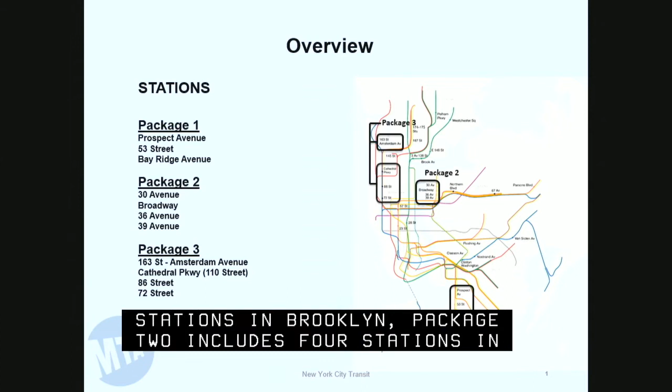The Enhanced Station Initiative includes a new approach to rapidly transform subway stations across the system. The initiative will focus on the continued responsibility of providing a state of good repair in stations, and starting with the revision to the station guidelines, dramatically change the look and feel of the stations.

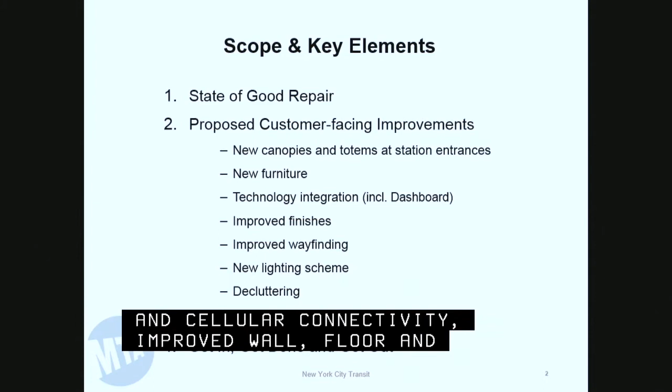Customer improvements being considered include new features such as canopies and informational totems at station entrances, a new family of coordinated furniture, integrated technology including Wi-Fi and cellular connectivity, improved wall, floor, and ceiling finishes, new signage, wayfinding and lighting, and the chance to declutter the station, where possible routing the conduits and cables in a consolidated path for better aesthetics.

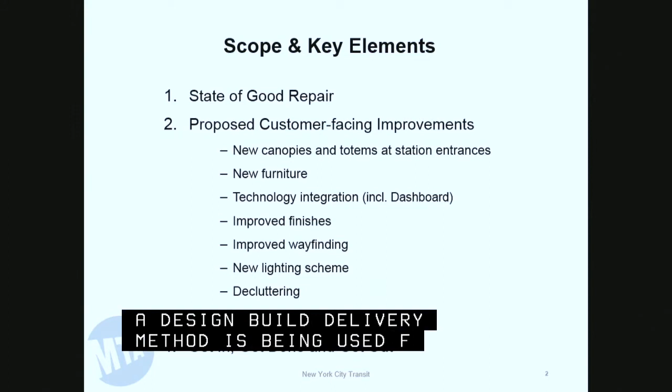A design-build delivery method is being used for the first time in the station's program area. Design-build is the process whereby a single contractor is responsible for both the design and construction of the project. It allows construction to start much sooner than the traditional design, bid, build method, fast-tracking the project and saving time, allowing the contractor to get in, get done, and get out.

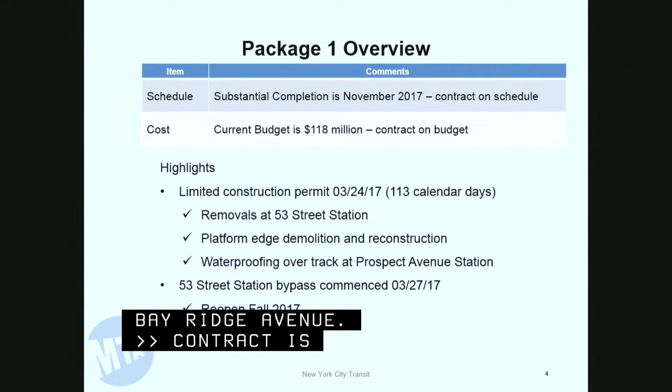The contract is on schedule for a November 2017 completion and is on budget. The first limited construction permit was issued 113 days after the design builder came on board.

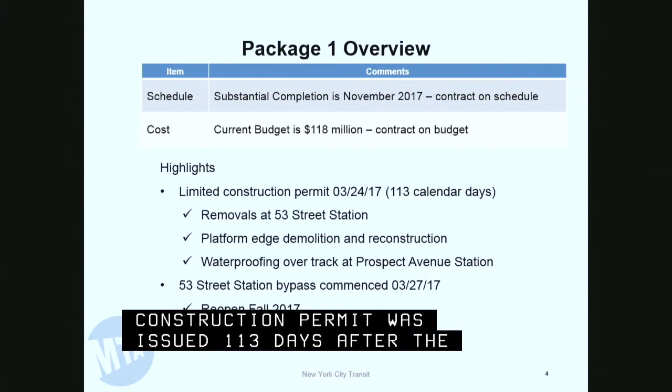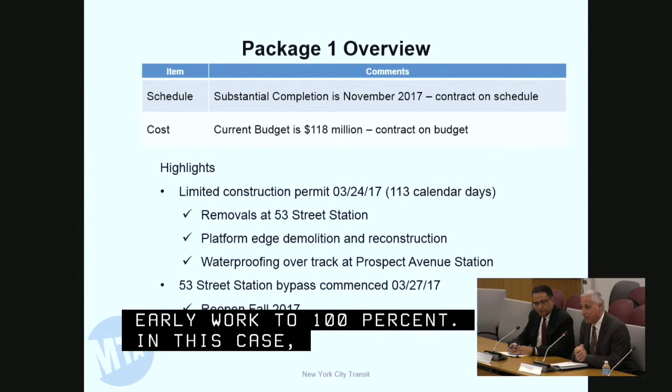Using the design build delivery method, we took advantage of the fact that the entire project did not have to be completely designed before the construction started. The contractor brought the early work to 100%. In this case, removals at 53rd Street, platform edge demolition and reconstruction, and waterproofing at Prospect Avenue. A construction permit was then granted, and the contractor was able to commence with the work.

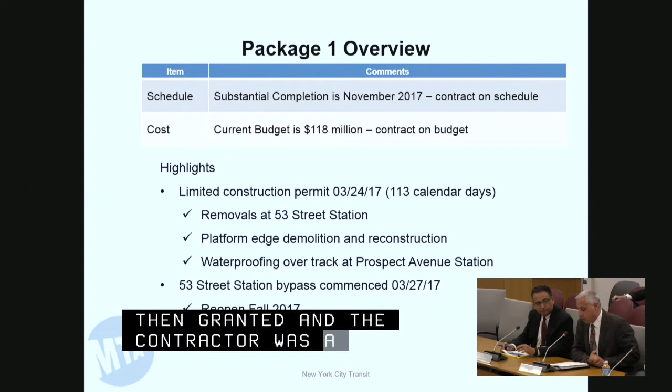This first limited permit allowed us to bypass the 53rd Street station on March 27th, and we are on schedule for a reopening in the fall of 2017.

We are managing what we see as the top 3 risks for Package 1: track access, unforeseen site conditions, and late deliveries can delay the already aggressive schedule. Constant communication and having a co-located team has proved beneficial in mitigating these risks.

Weekly updates will be provided for long lead items, such as informational totems and dashboards, to ensure delivery dates are met. The program facilitator has held 4 risk workshops, and the entire ESI program is using lessons learned to inform upcoming packages.

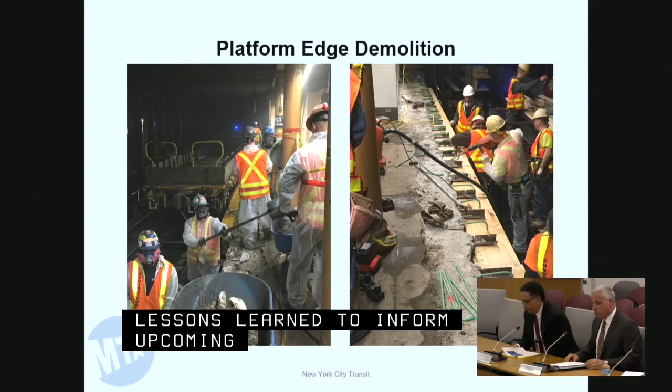Here are some photos of the work accomplished. The photo on the left shows the platform demolition, and the one on the right shows new rebar being installed. The best way to describe this work is that of an assembly line. Behind the demolition crew is the rebar crew, and behind the rebar crew is the concrete crew.

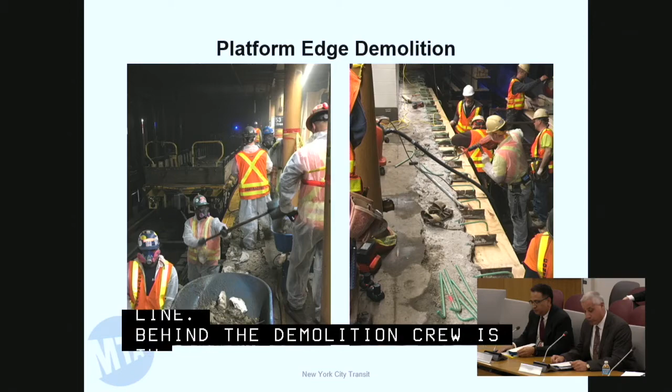On the left, you can see the rebar crew has passed through, and on the right, the concrete edge has been poured at an elevation ready to accept the new flooring.

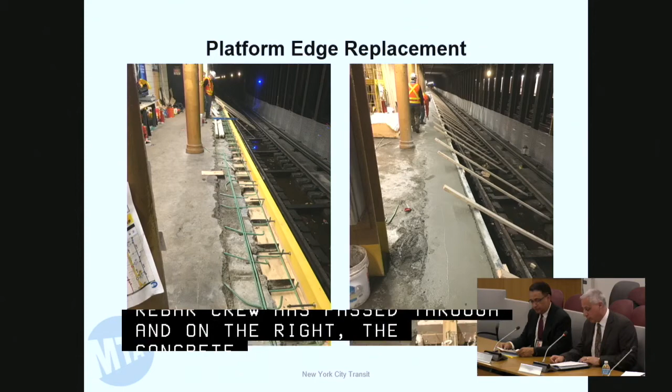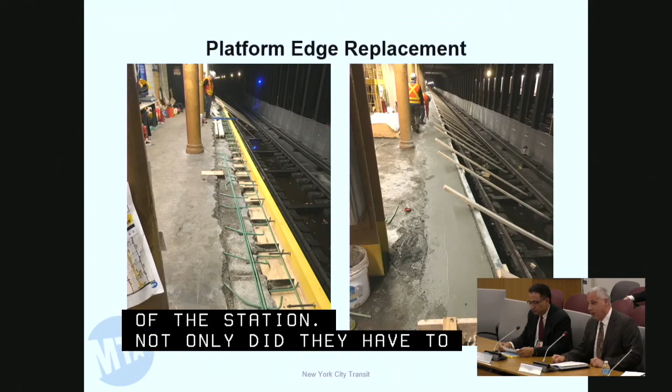While this may seem like rough demolition work, there is a delicate side to it. Throughout the weekend, over 200 workers were in and out of the station. Not only did they have to know what work they were performing, but also where they were performing that work and what work was going on next to them. The planning and choreography of the crews took much longer than the 53 hours it took to perform the work.

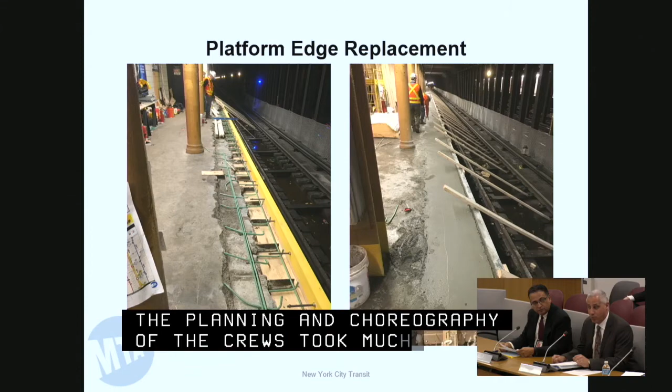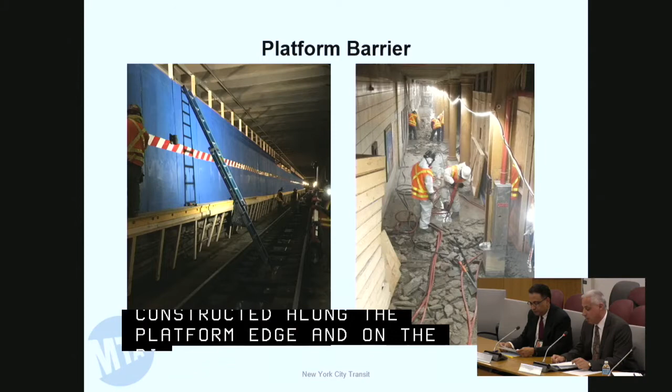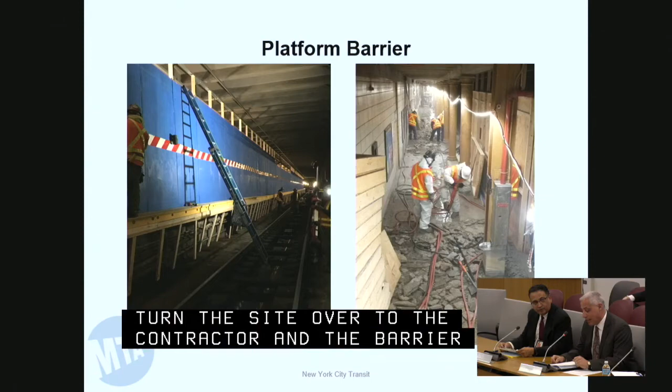The photo on the left is that of the barrier that was constructed along the platform edge, and on the right is the contractor working safely behind that barrier. One of the key points to any design-build contract is to turn the site over to the contractor, and the barrier does just that. It gives the contractor full access to the site without affecting service on the line.

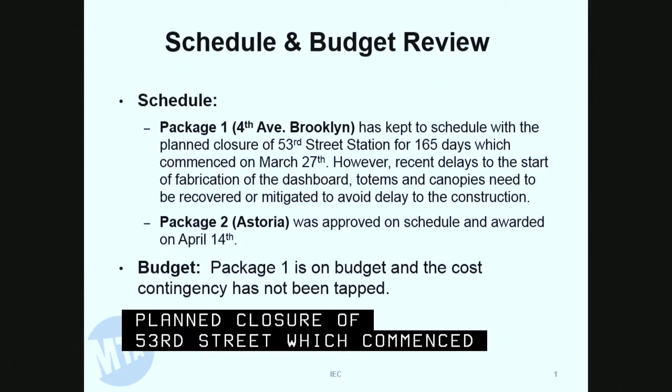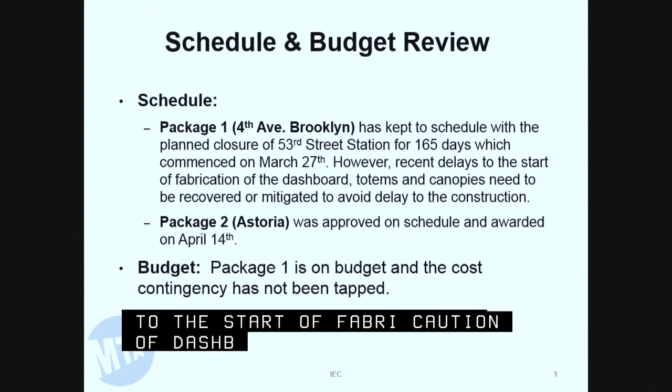Good afternoon, Mr. Chairman. In our initial report on this program, let me start with the schedule and budget review. For schedule, Package 1 has kept the schedule with a planned closure of 53rd Street, which commenced on March 27th. One thing we're watching closely is some recent delays to the start of fabrication of dashboard, totems, and other critical design elements for these improvements. Those delays need to be recovered or mitigated to avoid impacting construction.

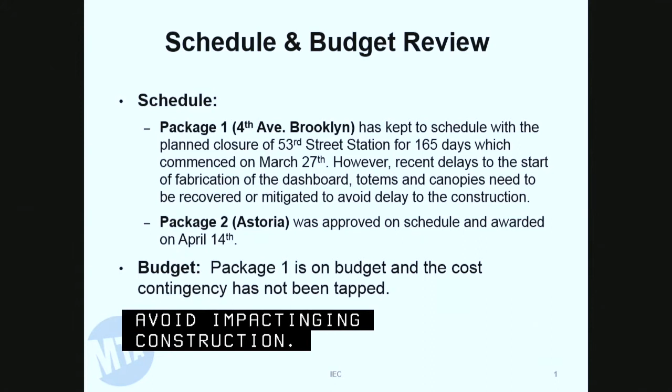Package 2, as you heard, has just gotten going. Looking at the budget, Package 1 is on budget, and the cost contingency remains intact.

Turning to a few observations on the program, I think we should recognize the project team for their organization. They've co-located the management, the key consultants, and representatives of the user groups into one project office, something that's cited as best practice by the design-build business, and it certainly has started out expediting information and resolving issues quickly.

We also want to support the program team's efforts to improve the schedule control of the fabrication of the long lead items I talked about earlier. And finally, the project has taken a careful look backwards at their first package and put together a process for assessing the design development and categorizing the lessons learned from their first experience, in order to improve particular details, requirements, and schedules for the remaining packages. That certainly will benefit the program as a whole.

That's my report. Thank you. Are there any questions or comments on the Enhanced Station Initiative? Mr. Albert.

While it's not the case on the 4th Avenue line in Brooklyn, there will be some places where there are some historical elements in the station, such as wonderful old tile work, and I just wanted to make sure we have a policy that while we're going to relight and put in fancy electronic gizmos, some of the history of the system will not be obscured by these new treatments.

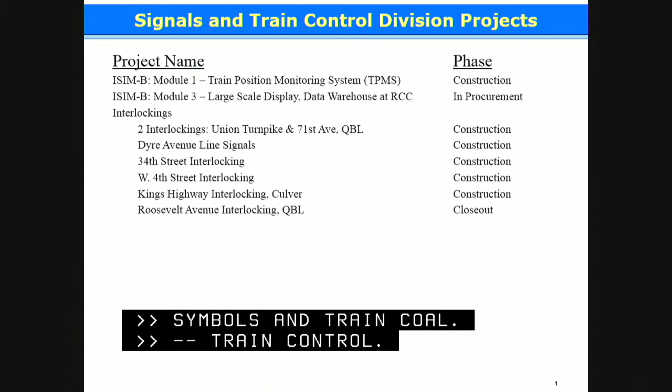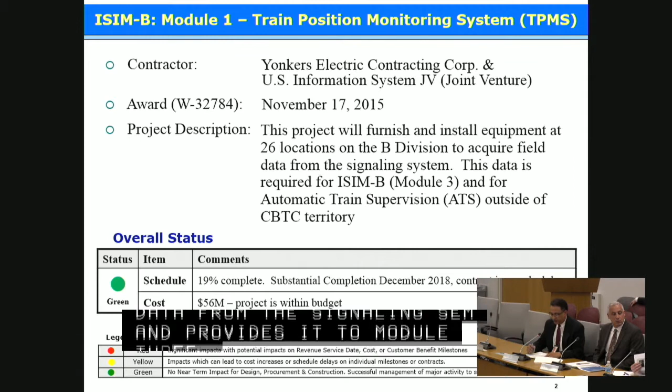I will update you on Integrated Service Information and Management projects, the ISIM projects. ISIM Module 1, the Train Position and Monitoring System, or TPMS, has been awarded to Yonkers Electric and U.S. Information Systems as a joint venture in November of 2015. This contract captures the field data from the signaling system and provides it to Module 3, which I'll speak to next. The contract is on schedule and within budget. The project has been making good progress and is doing good work in the field detail design.

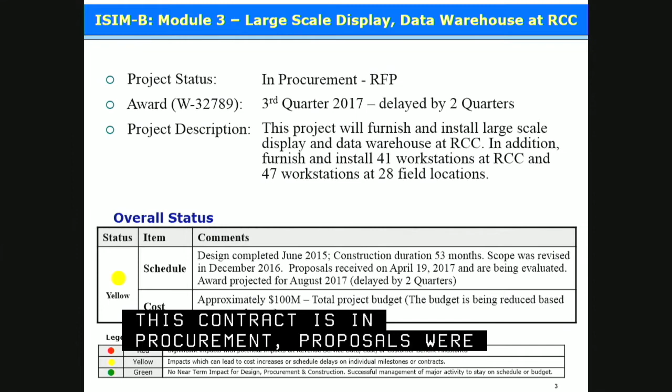ISIM Module 3, large-scale display and data warehouse at the RCC. This contract is in procurement. Proposals were received last Wednesday, April 19th, and are under review. The project will be awarded the third quarter of 2017 with a delay of 2 quarters. This delay is due mainly to the change in scope and budget.

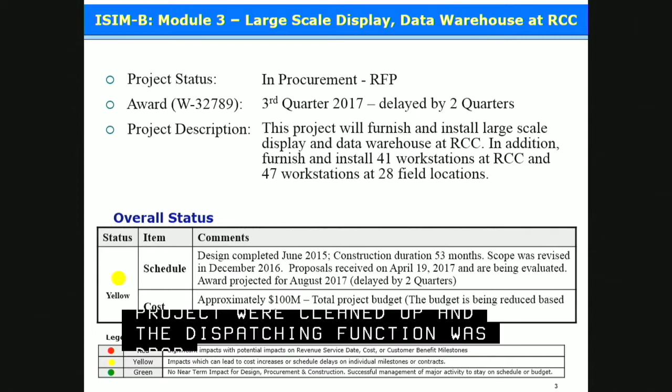All overlapping functions between the QBL ATS and the ISIM-B project were cleaned up, and the smart dispatching function was dropped. Furnishing the large-scale display for the entire B division and a data warehouse for the subway operations remains in. Total project is down to $100 million as a result of the scope change.

The interlockings: the following projects are the 6 interlockings that we have currently in construction. All are running on schedule and within budget except for 2. The substantial completion of the 2 interlockings at Union Turnpike and Continental 71st Avenue is now projected for May of 2018, and Dyre Avenue now is projected for November of 17. Dyre also has a budget mod in progress for approximately $7 million.

Both projects have developed detailed in-service schedules, and all TA service needs to support these in-services have been agreed upon by all supporting departments. That concludes my presentation. Thank you. IEC?

Good afternoon. My name is Nabil Gali. I'll present the IEC's report on the New York City Transit Signal and Train Control Program. This afternoon, we'll address the Integrated Service Information and Management B Division Program, as well as the interlocking signal modernization projects.

With respect to Module 1 of the Integrated Service Information and Management Program for Division B, the project is currently in the construction phase and remains on schedule and within budget.

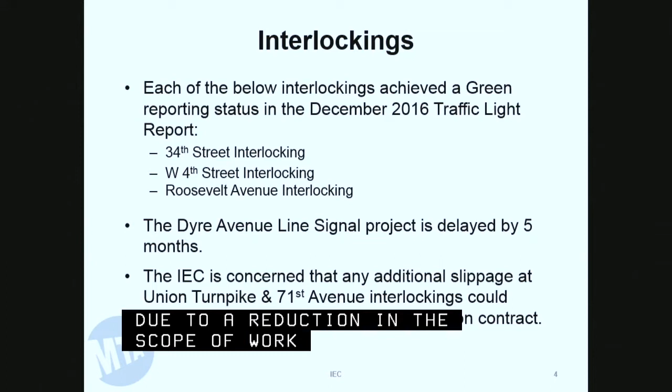With respect to various interlocking projects, as reported by the project team and based on the traffic light report presented at the December 2016 CPOC meeting, interlocking projects at 34th Street, West 4th Street, and Roosevelt Avenue are currently on schedule. Dyre Avenue Line Signal project is currently delayed by 5 months, and additional slippage was reported by the project team for Union Turnpike and 71st Avenue interlockings. This concludes IEC's report on the Signals and Train Control Program.

Questions or comments on signals and train control?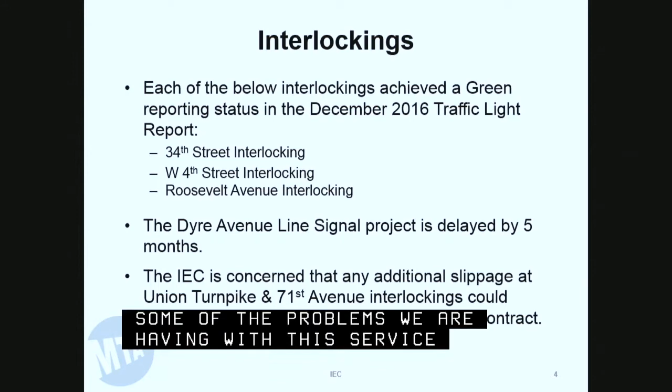Okay, report on systems and security. Mr. Beanstalk. Good afternoon. My name is Mark Beanstalk, and I'm the Program Officer for Systems and Security.

Today I will be updating you on the following projects in my program area: the recently completed VHF radio system, the Flushing Line Public Address Customer Information Screen project, Help Points and Passenger Station Local Area Networks, a new initiative to advance the delivery of train arrival information on the B Division, and finally the Bus Radio and Bus Command Center projects. The VHF radio project was awarded to Alcatel-Lucent in 2012.

In 2015, Nokia purchased Alcatel-Lucent and took over this contract. This project successfully upgraded the old New York City Transit VHF radio system to a new system, which complies with all FCC rules and regulations. The project was substantially completed within budget in December 2016. Closeout activities are continuing.

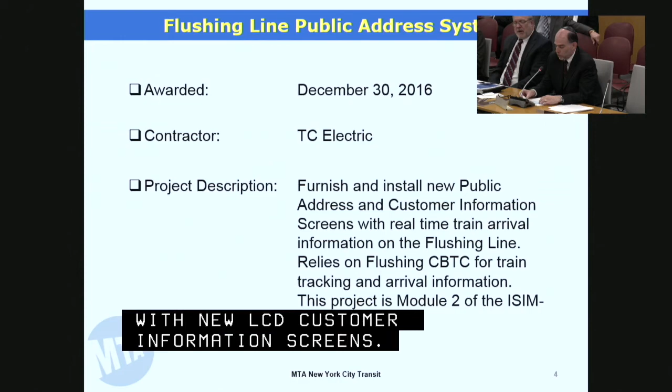The Flushing Line Public Address Systems contract was awarded in December 2016. This project will install new state-of-the-art public address systems on 21 Flushing Line stations from Main Street in Queens to Times Square in Manhattan. Stations will also be equipped with new LCD customer information screens. A new PACIS system was already installed at the 34th Street Hudson Yards station and is not part of this contract. The contract has a 27-month duration and a total project budget of $53.12 million.

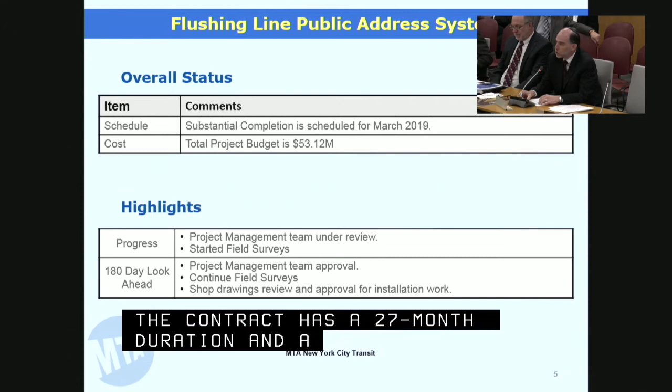There are no issues to report at this time. We are exploring options to accelerate the deployment of CIS screens at the stations in order to advance the delivery of train arrival information generated by the Flushing ATS system.

Help Points are one of our most successful customer communications systems. Nearly 2,500 Help Points have been installed in 399 stations since installation began in 2014. Help Points will be installed in 459 stations by the end of 2017.

The 9 Sea Beach Line stations, 3 ESI stations, and new Cortlandt Street stations are planned to open in 2018 with a full complement of Help Points. The total cost of the Help Point program is approximately $250 million.

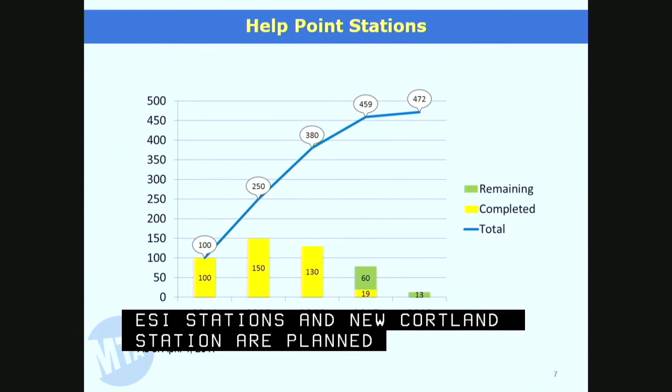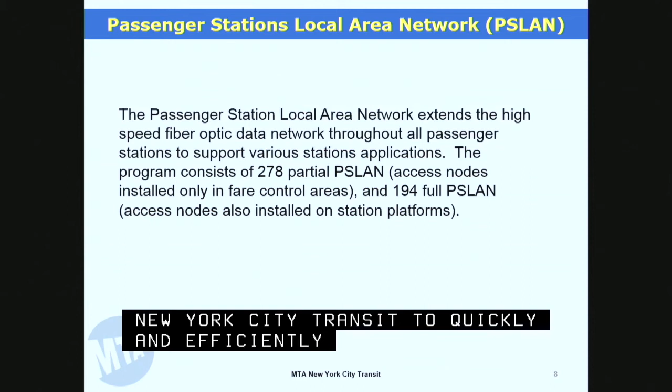The PSLAN, or Passenger Station Local Area Network, is this in-station network which allows New York City Transit to quickly and efficiently deploy new IP-based technology and services in passenger stations. The PSLAN connects the stations to New York City Transit's data centers over our existing wide area network. The PSLAN installation program also began in 2014, primarily to support the Help Point initiative.

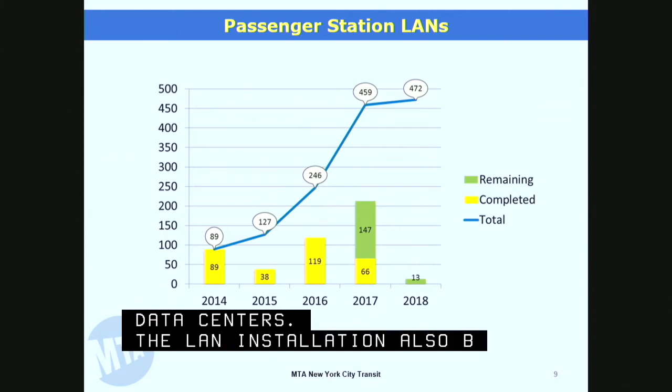Like Help Points, completion of all stations will conclude with the 9 Sea Beach Line stations, 3 ESI stations, and Cortlandt Street station in 2018. The total cost of the PSLAN program is approximately $110 million.

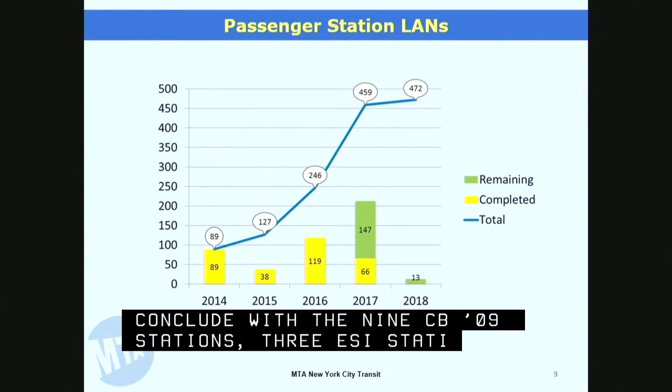This is the first report to CPOC on the new B Division train arrival project. This project grew out of a technology investigation and pilot which began several years ago to identify a way to provide countdown clocks on the B Division. The technology has now matured and can be used to provide train arrival information for all B Division subway stations.

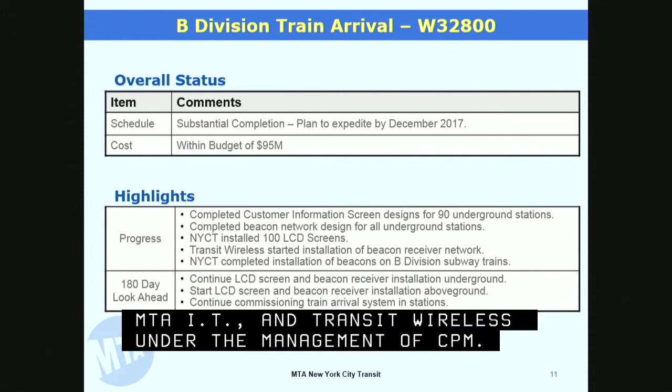The project is being implemented by the Department of Subways, MTA IT, and Transit Wireless under the management of CPM. This project will install new LCD customer information screens in B Division stations to display train arrival and customer information.

Beacons installed on trains broadcast information to receivers in passenger stations. The information is processed by New York City Transit's iTrack system and transmitted back to the stations to be displayed on the customer information screens as well as on the app.

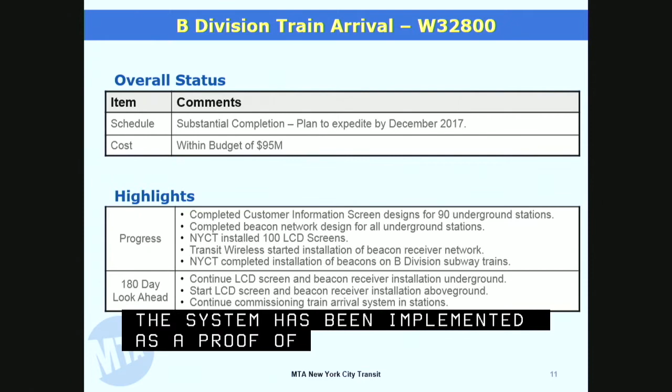The system has been implemented as a proof of concept on 8 Broadway Line stations and most recently at the main fare control areas of the 2nd Avenue subway stations.

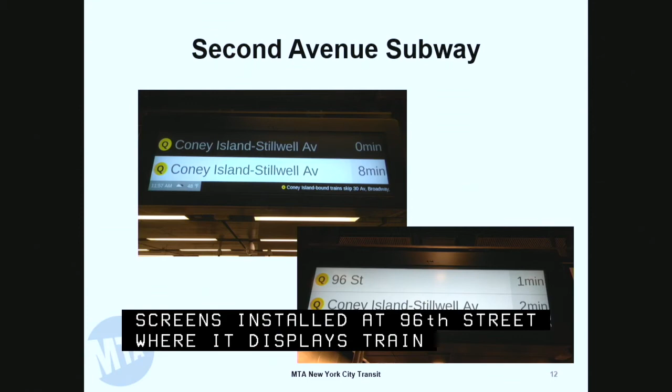The bus radio system project was awarded to PTG just over a year ago. Under this project, PTG is designing and installing a new digital bus radio system for New York City Transit and MTA Bus. To date, we have completed surveying all base station sites citywide.

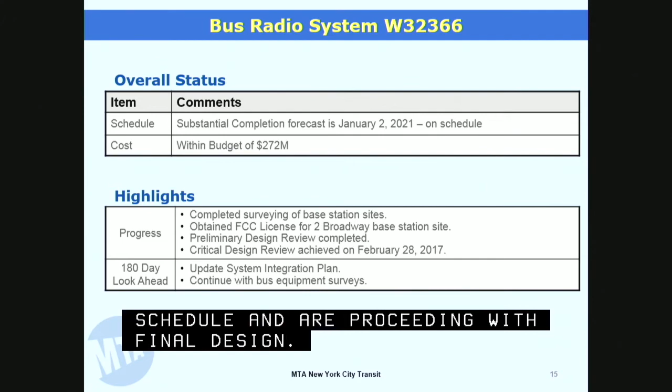We recently achieved the critical design review milestone ahead of schedule and are proceeding with final design. We are also preparing for the pilot installation on the first 200 buses. At this time, there are no delays to report to the project contractual critical milestones.

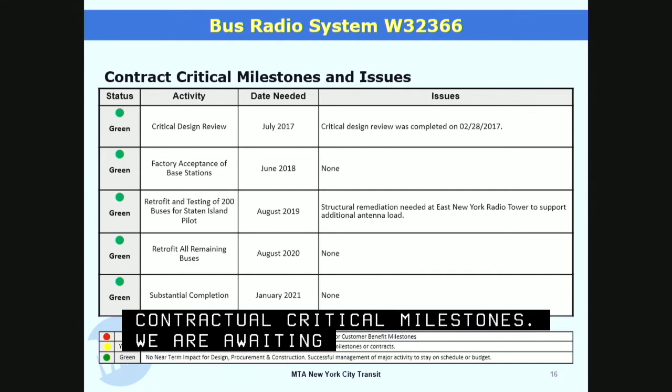We are awaiting a final report from the engineering consultant on the East New York antenna tower, which will require some remediation work to safely support the new antenna loads.

The Bus Command Center construction contract was awarded to MPCC Corporation in June 2015, and construction activities are underway. To date, the contractor has completed the foundation and started erecting the steel superstructure. The precast exterior wall panels have been delivered to the site and are also being installed. Over the next 6 months, the building will be enclosed and interior work will commence.

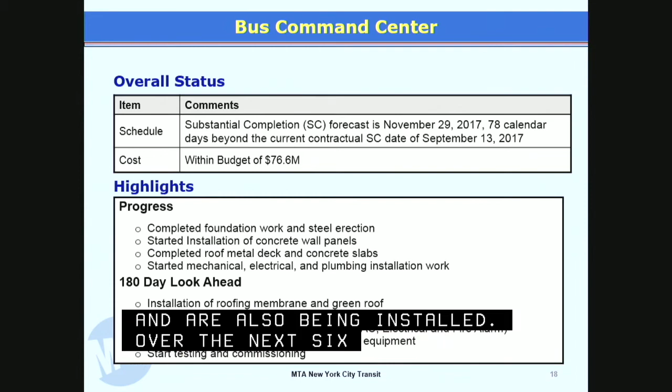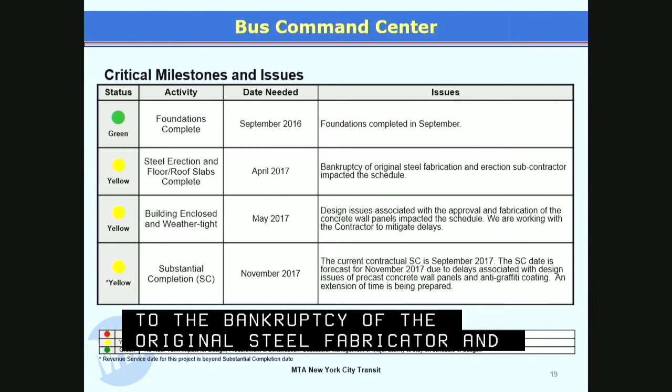We have established 4 interim reporting milestones for major construction activities, and their status is shown on this slide. We did experience some delay due to the bankruptcy of the original steel fabricator and erector, but a new subcontractor was identified and engaged. In addition, there was some delay due to the redesign of the precast exterior wall panels and change to the anti-graffiti coating.

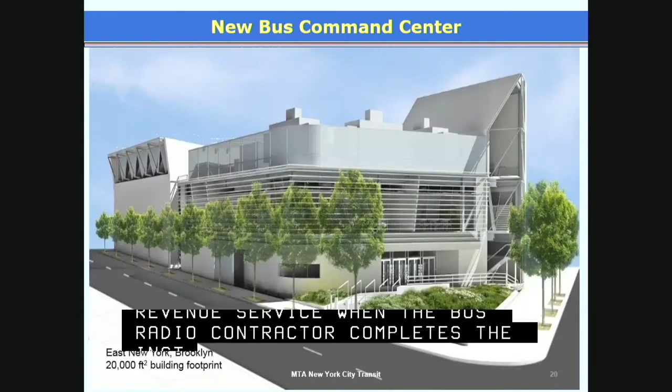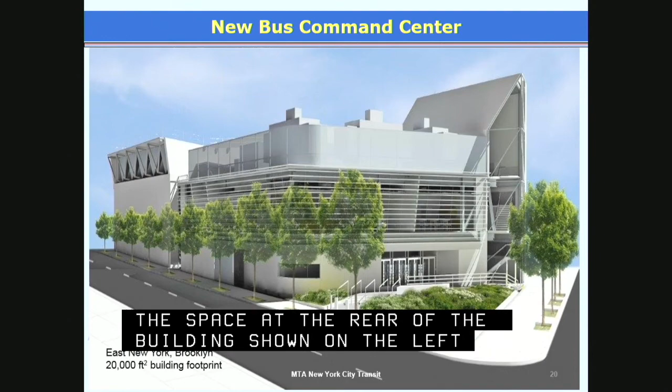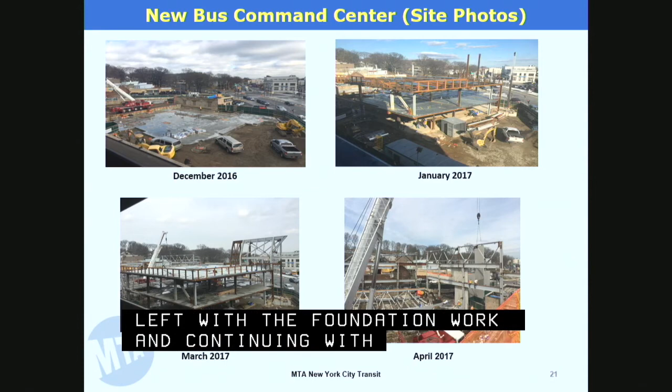These photos show progress at the site, starting on the top left with the foundation work and continuing with the steel erection through March, and the recent precast concrete exterior panel installation, which began this month. This concludes my report. Thank you.

IEC, good afternoon. My name is Calvin Gordon. I'm presenting the IEC's review on 4 projects in the Systems and Security Program. These projects are the Flushing Line Public Address System, the B Division Train Arrival, Bus Radio System, and the Bus Command Center.

Looking at the Flushing Line Public Address System, as far as the schedule and budget review, the IEC notes that the project is currently on schedule for March 2019 substantial completion. Additionally, as the project was only awarded in December 2016, there are no issues with the project budget.

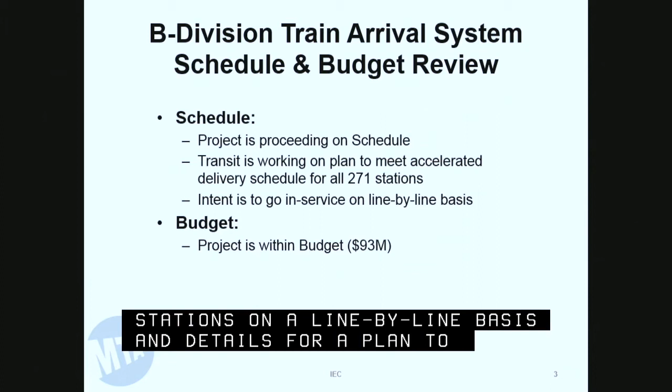Next slide, B Division Train Arrival System. Looking at the project schedule and budget, the IEC finds that the project is on schedule. The intent is to roll out these stations on a line-by-line basis, and details for a plan to achieve an accelerated delivery of all 271 B stations is being worked on by the project team, and IEC will review once it's finalized. The IEC also finds that the project is currently within budget.

Looking at the B Division Train Arrival System observations, the IEC wants to note that this is a predicted method for train arrival. Therefore, the accuracy is based on real-time information generated by RTO. In regards to the accelerated schedule that was mentioned earlier, the IEC feels close coordination with transit wireless efforts is essential in achieving the rollout of all remaining stations. Further, it suggests that an IPS, an integrated project schedule, be developed and used to assist in achieving this goal.

Bus radio system. Looking at the schedule and budget, the IEC concurs that the project remains on budget. The IEC notes that the contract baseline schedule has been approved and the project is currently on schedule. NYC bus radio project substantial completion is remaining at January 2021.

IEC observations on this project. The IEC notes that the CDR was delivered ahead of schedule, and as the agency has stated, it was very comprehensive. This was a major accomplishment.

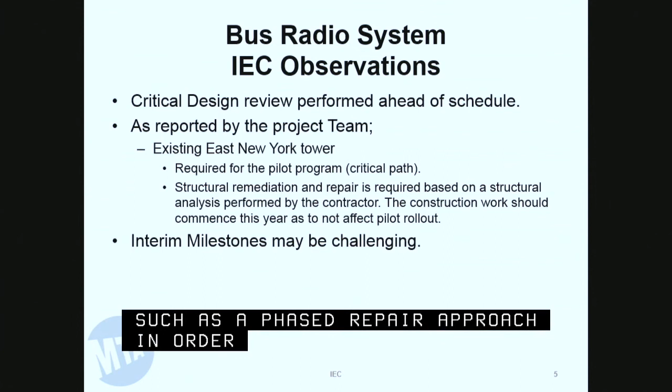As far as interim milestones, we feel the interim milestones should be mitigated further to ease schedule compliance. The current contractor's accepted schedule depicts potential slippage in future interim milestones. It is not unreasonable, however, to expect the project could mitigate these future potential delays over the course of the next few years.

Moving to the Bus Command Center, as far as schedule and budget, as reported by the project team, the IEC notes that the current CPM schedule depicts a 78 calendar day delay. The IEC concurs with the current substantial completion date forecasted. Regarding the budget, the IEC concurs that the project is within budget and there's no issues with the project budget contingency.

Lastly, the IEC observation. As the bus radio system and the bus command center are inherently linked together, the IEC concurs that the BCC will be completed in time to support the bus radio system, and the project team and the contractor are working diligently to meet the project goals. This completes the IEC's review.

With regards to the B Division train arrival, it's great news that there's an expedited schedule. What are the factors that contributed to that schedule being advanced? And a second question, sorry.